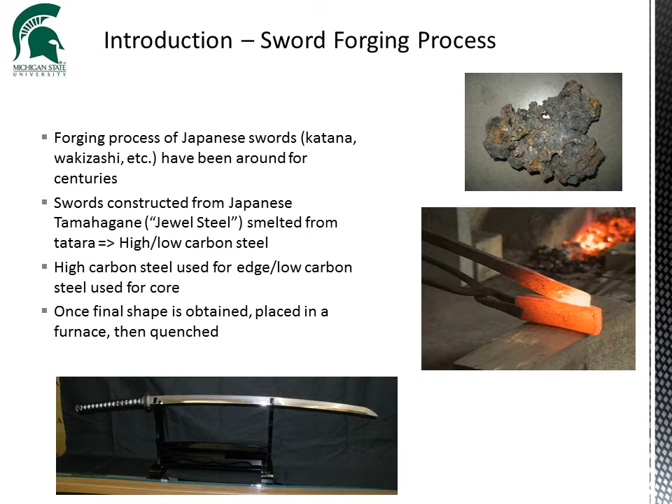I'm going to be talking about transient heat characterization of sword cross-sections during quenching. Now, the forging process of Japanese swords has been around for centuries and involves making high and low carbon steel, high carbon steel for the edge, low carbon steel for the core, and when the final shape is obtained, it is placed in a furnace and then quenched.

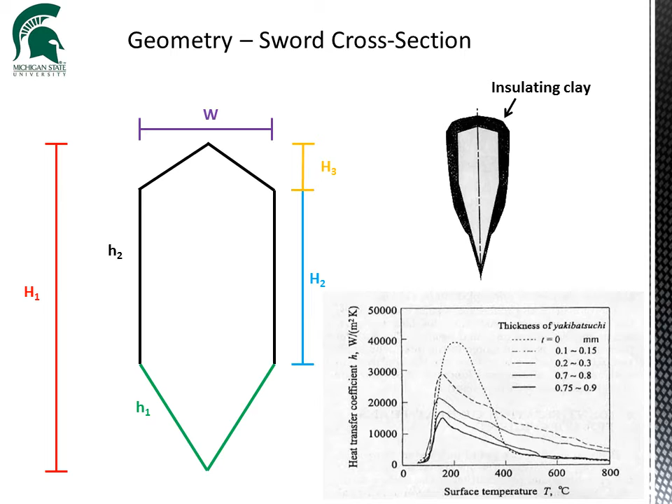Now, the geometry we're using is diamond-like, where the dimensions are H1, H2, H3, and then W. And the convection coefficient away from the sword is determined from this chart, where the edge uses little h1 and the remainder uses h2, and this is due to the thickness of insulating clay.

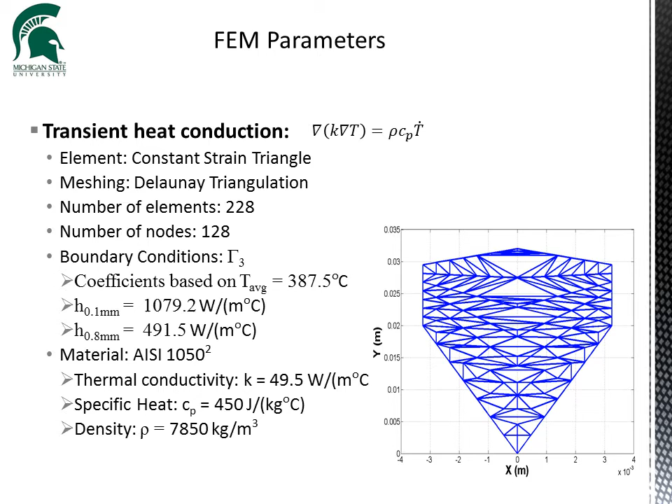Now, the parameters used in the study are a constant strain triangle meshed using Delaunay triangulation with 228 elements, 128 nodes, and a gamma 3 boundary condition, where an average temperature is used for the convection coefficients, where the average temperature is based on initial and final temperature of 387.5 degrees Celsius, where these are convection coefficients for the edge and the remainder. And we also use steel for the cross-section material.

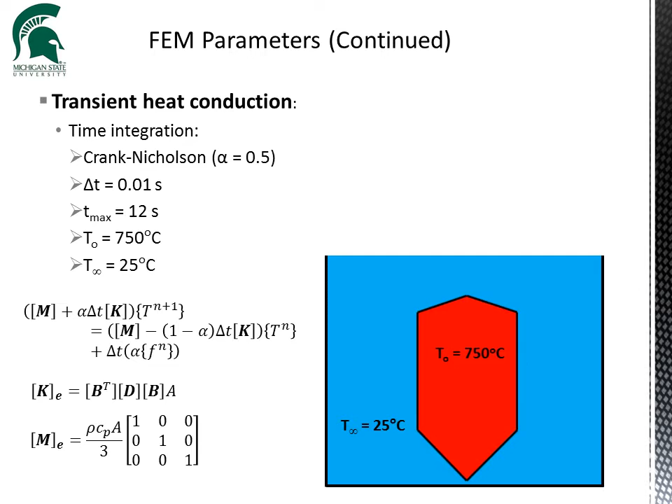Now, time integration is done by using a Crank-Nicolson scheme with 0.01 seconds for our delta T, 12 seconds for our max, an initial temperature of 750 degrees Celsius, and a surrounding T infinity of 25 degrees Celsius. Now, our sword cools and arrives at 25 degrees Celsius. The cases we looked at are varying the height, the width, and the convection coefficient.

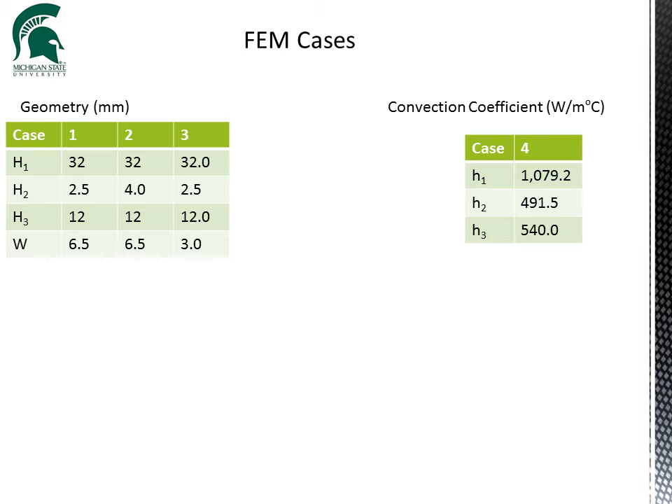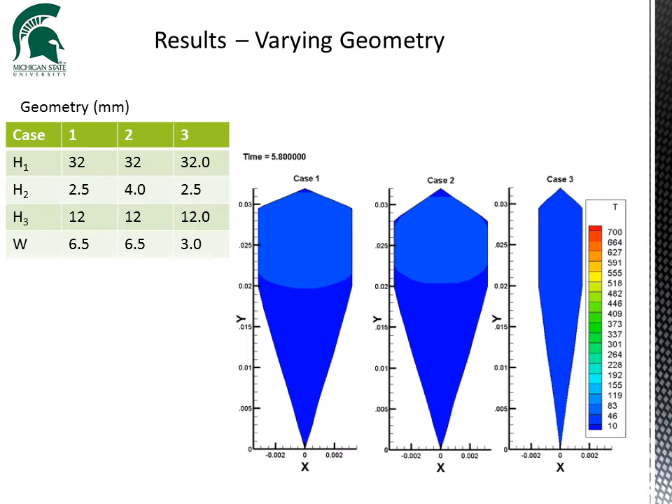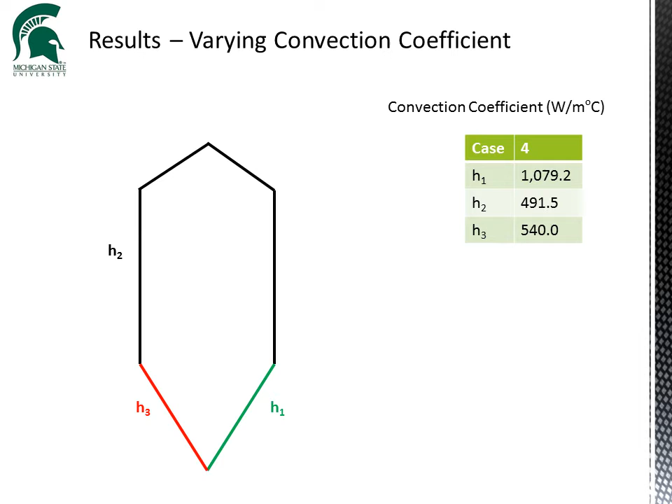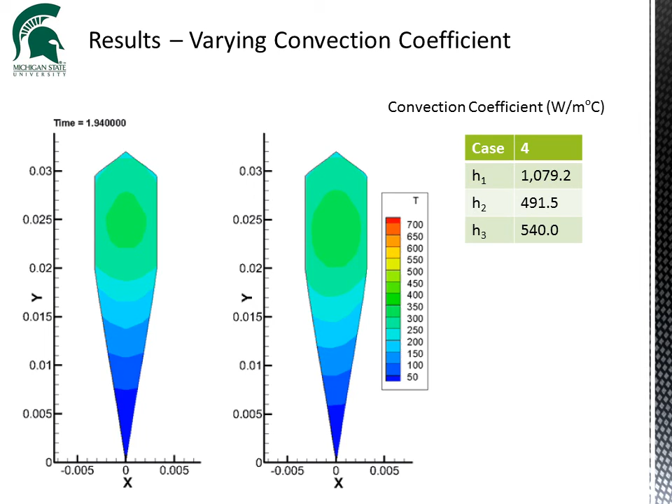And so, in summary, we applied a finite element method to the quenching process of a Japanese katana, varying the cross-section dimensions and convection coefficient, and found that the thinner cross-section produced faster heat transfer to the steady state, while an asymmetric heat transfer coefficient shows asymmetric temperature distribution.